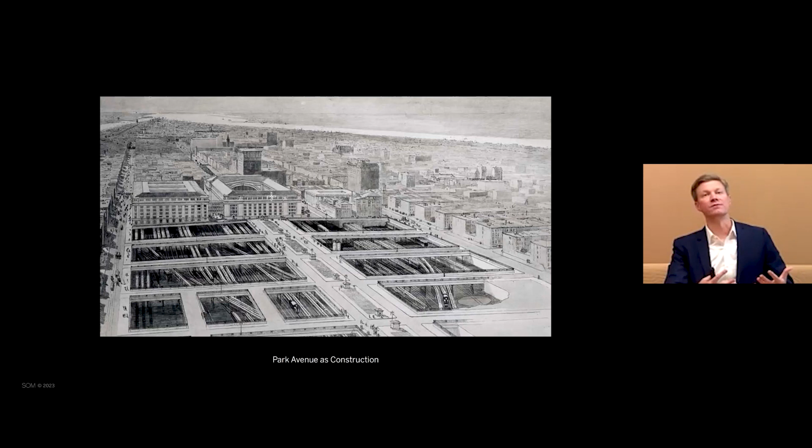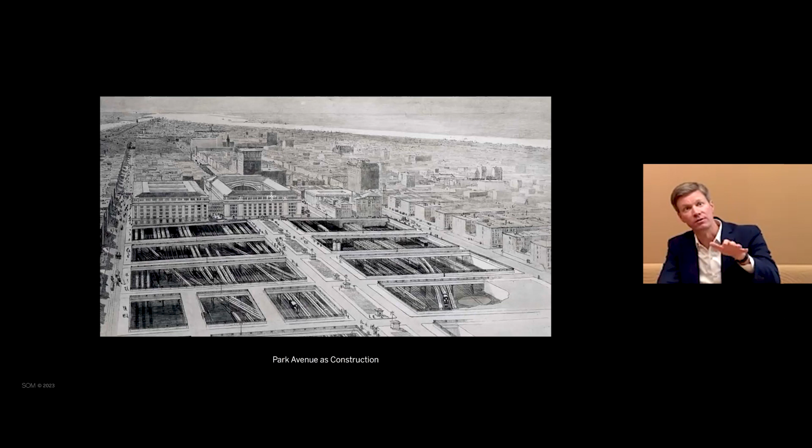Of course, these two individual buildings share a common location, Park Avenue, an incredibly important promenade in New York as well as the world, whose real estate was in a sense created out of thin air, if you will. Many of you likely know the story of how the trains entering Grand Central, which you see at the center of this image, were depressed into a sunken trench when they were electrified and then eventually covered over, creating the new real estate for Park Avenue.

And this brand new avenue created out of thin air became instantly a kind of civic space for New York, where celebrations were held, celebrating the victory of World War I, or everyday use, really as a public park for recreation, for strolling down the park of Park Avenue, or today for the lighting of the trees along Park Avenue. I take my daughter Caroline and we watch as the trees are lit up every year at Christmas time, or during open streets in recent years when Park Avenue is cleared of cars and New Yorkers of all stripes from all boroughs come out and enjoy this great civic public space, a great lung for the city.

Now, the architectural backdrop for this public space has of course evolved over time from a kind of continuous masonry street wall. You can see it's very consistent, and the height is very even here, and that was the case on both sides of the avenue, to the beginnings of the introduction of a new kind of architecture, beginning really with Lever House, which at the time, if you look at this photo, must have looked like a spaceship had landed on Park Avenue amongst all of these other masonry buildings lined up for 2 miles up and down the avenue. To what we have today, which really is a collection of the greatest architectural hits over time for the city of New York.

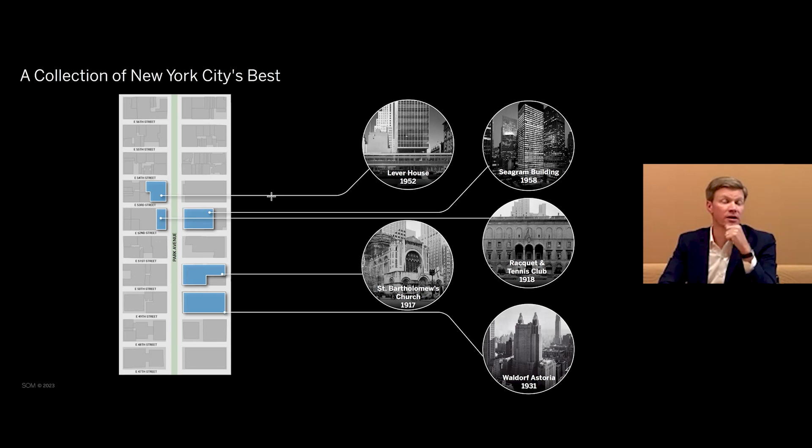So if we look at this map, just in a small section from 49th Street to 54th Street, we have 5 individually designated landmarks recognized by the city of New York, and I'm sure more to come. So it's evolved from a kind of consistency to really the greatest hits over time. And 2 of those designated landmarks, Waldorf Astoria on the left and Lever House on the right, engage with that public space that is Park Avenue in a meaningful way. The Waldorf Astoria invites the people into the building, has very generous public spaces, which we'll talk about, and Lever House invites them onto the site in the form of this open plaza, which Amy will tell us more about

in a bit. And so both of these projects, as Park Avenue evolves and becomes this series of all-star players, seek to ensure that future by restoring that past. Our experience and our thesis is that the restoration of these two projects is really a transformative act, one that builds a bridge to a new future for the buildings themselves and for their participation in the civic ballet that is the architecture along Park Avenue. So how might one go about an architectural project with that lofty idea in mind?

Well, we try to balance three competing ideas. One being the original design intent. So what did the architects want to happen? How can we discover that through original source material, which is not always what was built? The second ingredient in this recipe is the existing conditions, often different than the original design intent and also different than what was originally built. We have to discover that through deep research.

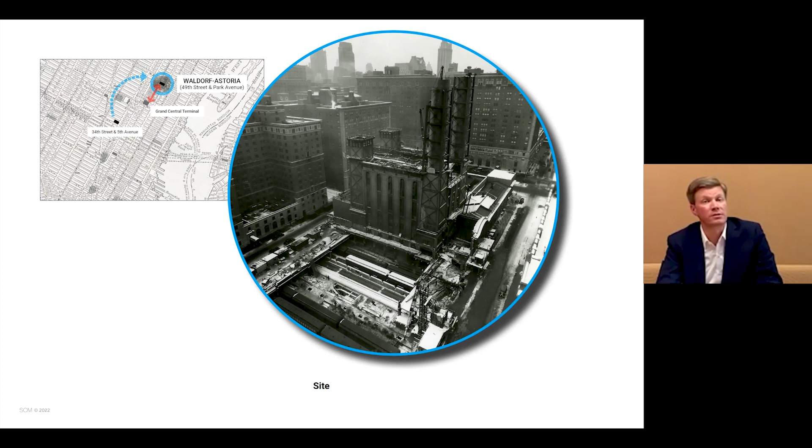was torn down. The building moved north to its current location at 49th Street and Park Avenue to take advantage of the new Grand Central Terminal and the importance of rail travel, and was built over those existing rail tracks, which you can see here in the image below this power plant at the site of the Waldorf Astoria Hotel.

And the architectural firm of Schultze and Weaver was hired to design this new hotel. They were a well-known hotel architect, designing other significant landmarks here in New York and around the United States as well. And they designed a hotel that had a kind of split personality. It was a kind of transitional building.

It borrowed from some of the nostalgic elements of the original Waldorf Astoria hotel that folks remembered, but it also had to be a modern, up-to-date, contemporary building. And so it really truly is, despite its contrast to Lever House at the beginning of this, a modern building. It's an Art Deco building.

This kind of split personality, this transitional sense was received in a variety of ways, sometimes positive, sometimes not so positive, as in the case of Lewis Mumford here in his New Yorker article. Nonetheless, the building opened to great fanfare and several decades of great success. It was frequented by celebrities, politicians, the elite.

Significant events took place there. President Kennedy is speaking. Grace Kelly was married to the Prince of Monaco there. So a very important cultural element of the United States and of New York in particular.

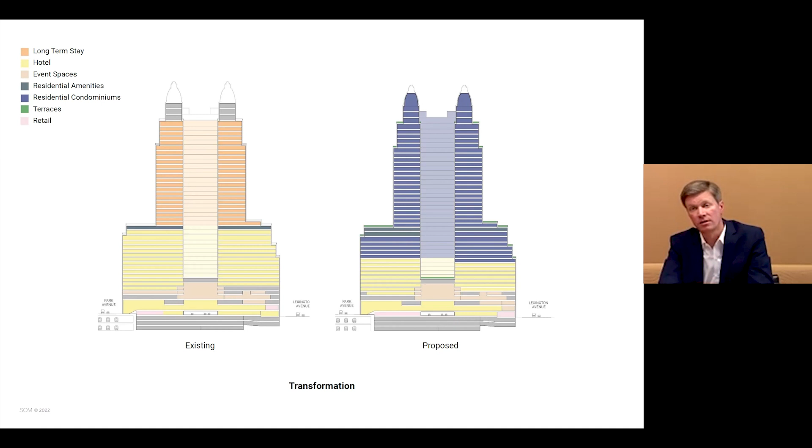So the project at hand, which we undertook beginning in 2016, was to convert a 1,400 key hotel to 375 keys, so there'll still be a hotel component, plus 375 condominium residences. And so that's the big change. There's many other changes we'll talk about, as well as restoration to many of the public spaces.

And it really always was and will continue to be an entire city within a building, a whole diversity of programs, from retail to events to hotel to residences. You can find it all in this building. That will continue to be the case. It's 1.6 million square feet, an entire city block. And so composing all these elements is a kind of three-dimensional jigsaw puzzle.

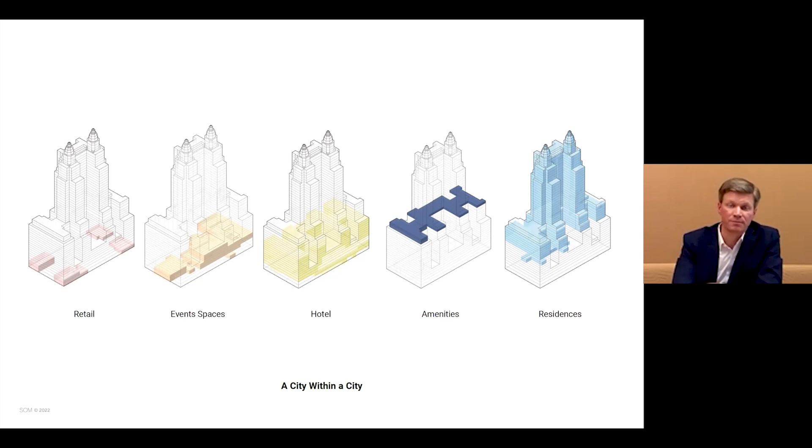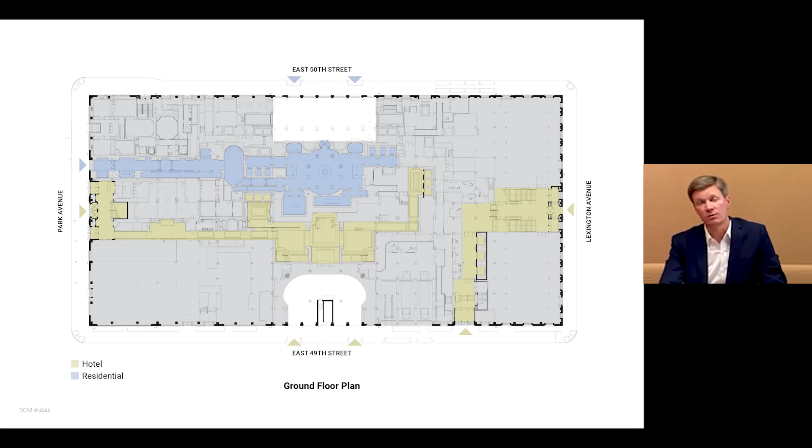So how does one go about creating that change, that transformation? So we'll talk about the reconfiguration of the building to start with. So the ground floor plan, for example, at Park Avenue on the left, we need two entrances. Now we need a hotel entrance and we need a residential entrance.

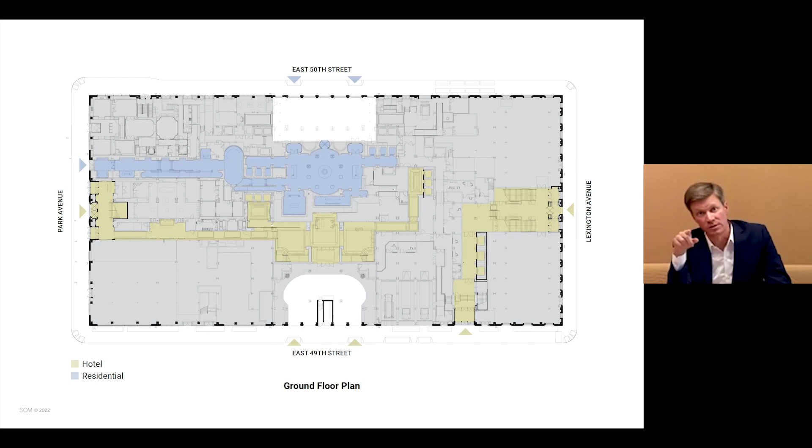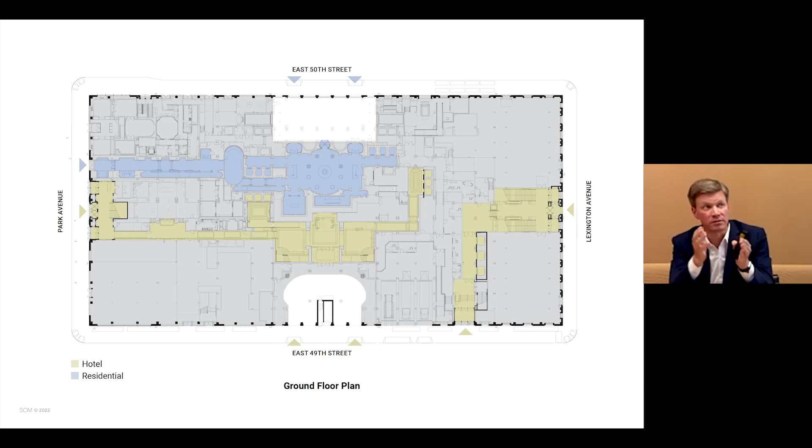We need porte cocheres for the hotel, which we now have on the south, and for the residential component on the north. And so you can see here highlighted in yellow and blue, you have two competing in parallel experiences, entry, lobby, and so forth.

At the mid-block portion, so we're still looking at ground floor plans here, there always was a porte cochere. You could drive all the way from 49th Street through that porte cochere to 50th Street, as seen in the image on the left. That was still the case at the time that construction began, although the composure of those elements had changed quite a bit.

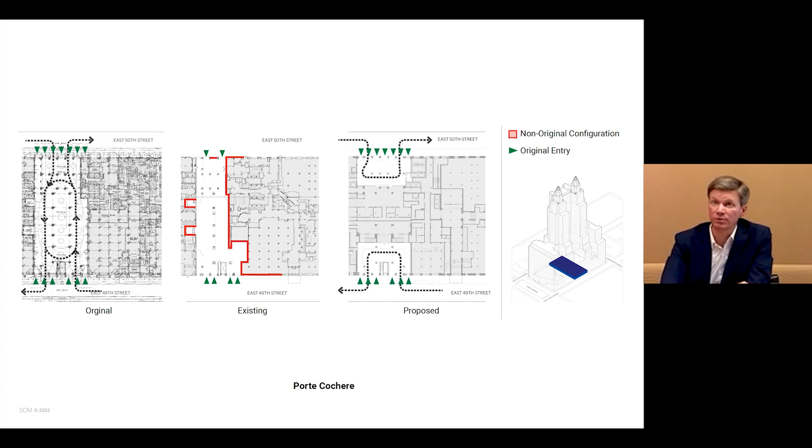And in the future, we're bifurcating that porte cochere into two distinct cocheres, one for each of those two programs, while restoring the configuration and the appearance of those openings on the exterior. They've been badly altered today, bricked in and so forth, filled with louvers. And so this is what they will look like from the exterior in the future, while having created an entirely new experience on the interior.

Bifurcating those porte cocheres allows us to do something else, though, which is to put the residential lobby where it really wants to be, at the center of the building, at the center of the block, and allows us to take from that residential lobby corridors to two distinct elevator cores, one on the east, one on the west.

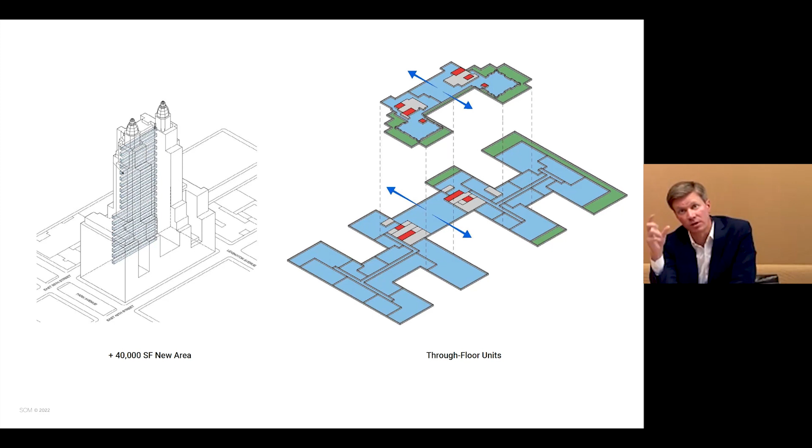The building essentially has two wings now, and one would take one of those two elevators up to your residential unit. That allows us to eliminate corridors which used to connect the two wings of the building, creating a lot more newfound space, if you will, and to create through floor units at that center spot, because we no longer need a corridor connecting those two distinct cores.

So there's a lot of kind of behind the scenes reworking of infrastructure like that in order to make a transformation like this possible. And that all is in service of the residential units. So here you see a typical floor plan of the Waldorf Astoria at a lower level. It's a very large floor plan, but it's just separated into two wings when we get off the elevator core on one side or the other and go to your unit.

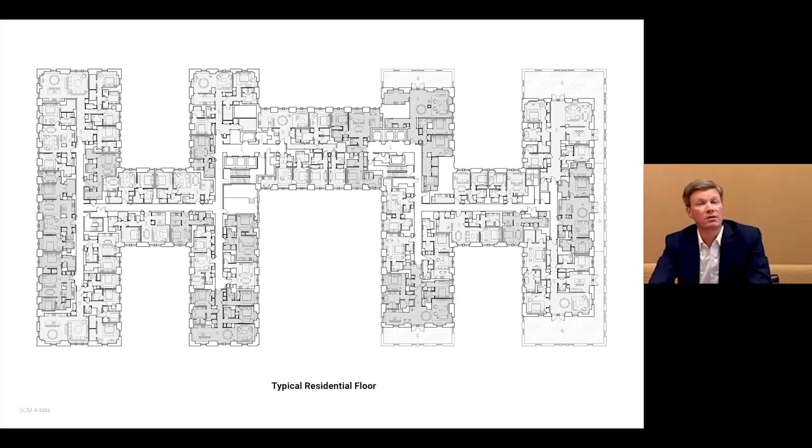When working with an existing building, it has to work with what's there. So the units are more cellular. There are crown moldings and coves around individual rooms. If this were a brand new residential building, what we generally see on the market is a flat ceiling, very, very open plan, right? Kitchen, living, dining.

You still have that openness that's contemporary here today, but within the framework of beams and columns and punched windows that already exist there. So one has to work with the existing structure and rhythm of the building that is there.

So moving to the public spaces, the Waldorf Astoria, I think, is really special because it has this incredible abundance of public spaces that you can just walk right in. And when I started this project, there wasn't a person that I told about it that didn't tell me, well, I cut through the lobby of the Waldorf Astoria every day on my way to work for 10 years, or I stayed there on the night of my wedding. Every New Yorker has a Waldorf Astoria, and this public space is a big part of that.

So these are section drawings. There are 3 of them here indicating the original condition, and that is a Schultze and Weaver drawing that we found in their archives. The center is an existing condition drawing that we drew, and the bottom is a proposed future condition that we also drew. So we can very carefully compare all 3 of these states to one another.

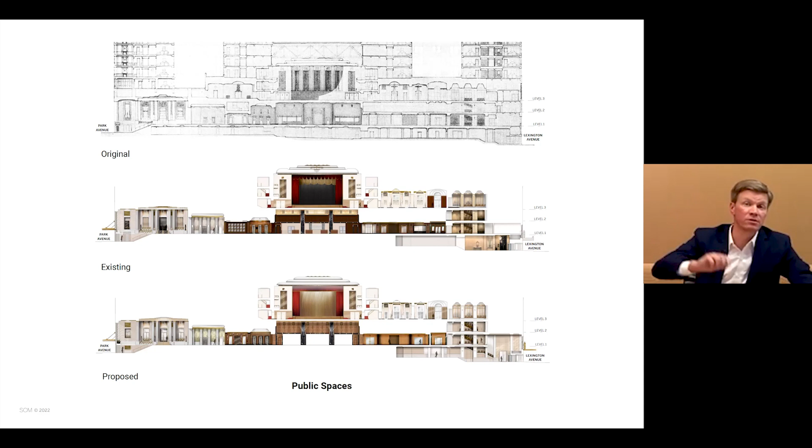You can also walk up to the 3rd floor where there are a variety of event spaces. This is what those spaces looked like originally in plan. So this is the main level of the hotel. It's actually up 1 level from that porte cochere level that we were looking at before. And this is another original drawing that we found in the Schultze and Weaver archive.

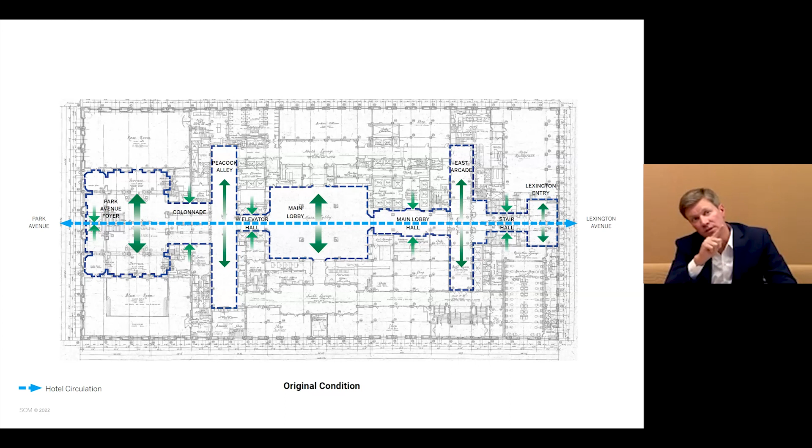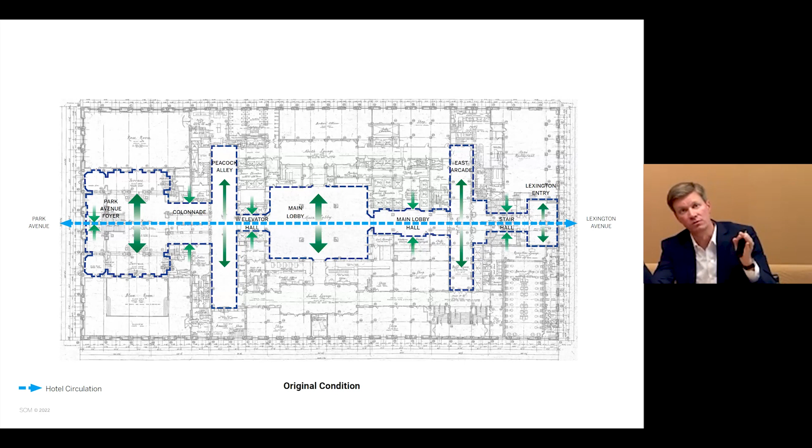And I will admit to you that we did not understand the configuration of these public spaces until one of our designers was tracing over this original drawing with a thick pen. And it was at that moment that we realized, as you move in an enfilade fashion from one avenue to the other, that the spaces expand and compress in a perfectly alternating rhythm as you move along. And this must have been to increase the sense of drama, and I think aligns with the variety of styles and decoration that one finds in room to room.

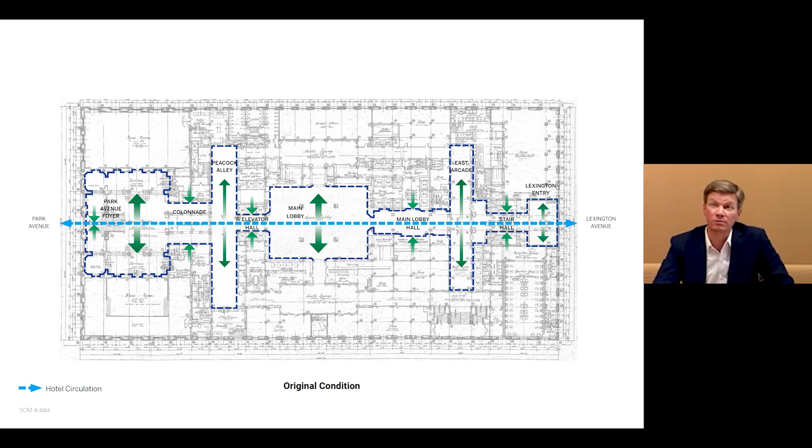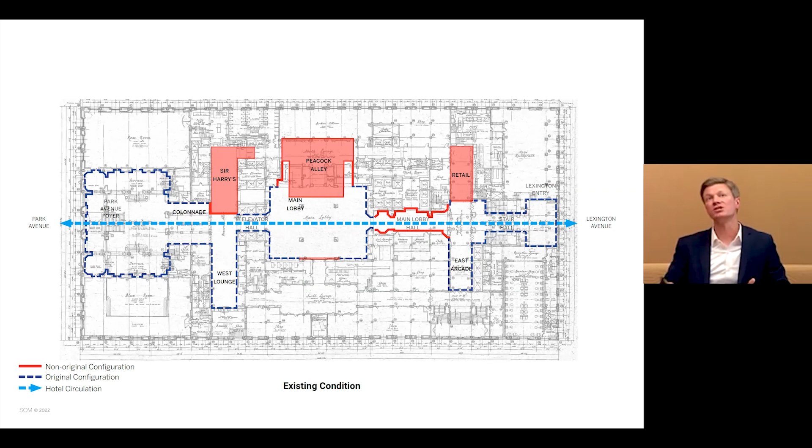How come we didn't realize this? Well, because the spaces have been changed and altered so badly over time that when you visited, you really just didn't even understand that. Spaces have been chopped in half, had restaurants inserted into them, had a store inserted into them, and really changed so much that sense of procession and drama had been lost. And so in the future condition, we're going to be able to restore that sense of drama as one moves through these public spaces. I'm very excited about that.

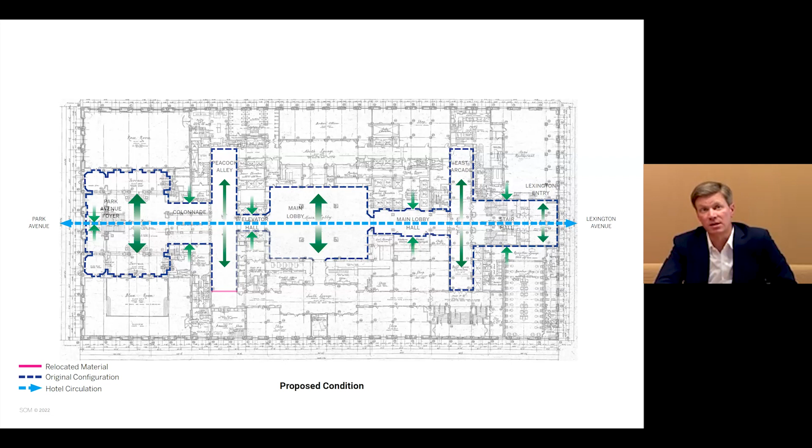And I'll show you just a couple examples of perhaps the most significant public spaces. We'll start with the Park Avenue foyer. But before we do, one additional theme that we're able to restore is the sense of lighting. And so we discovered in researching this project that there was this idea about how lighting should be handled in all the public spaces, that it should be indirect, that it should be somehow mysterious.

So I always compare it to Grand Central Terminal. That's how I think about it. So just down the road, built in 1913. There, the electric lighting of a public building was brand new. And so there are these chandeliers and they have exposed bulbs on them. They're showing off, this building is electrically lit. Isn't that great? Well, here, a few years later, 1931, the new thing will be to hide the sources of lighting. How is this space lit? It's mysterious. And that was consistent through the public spaces. However, that had been lost. That sensibility had been lost over time as piecemeal renovations had taken place.

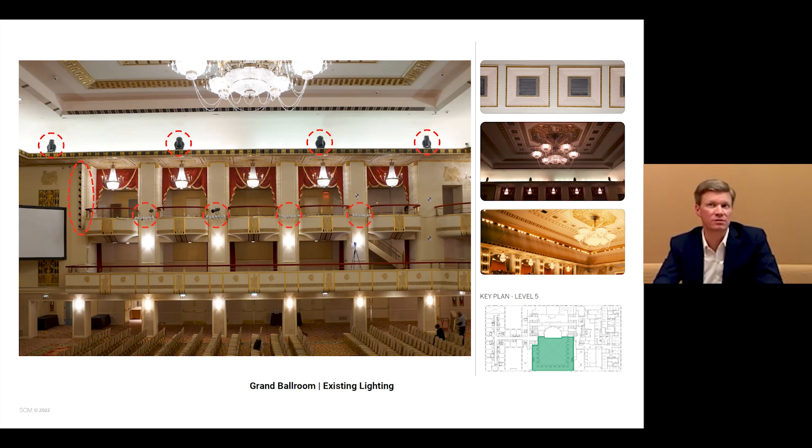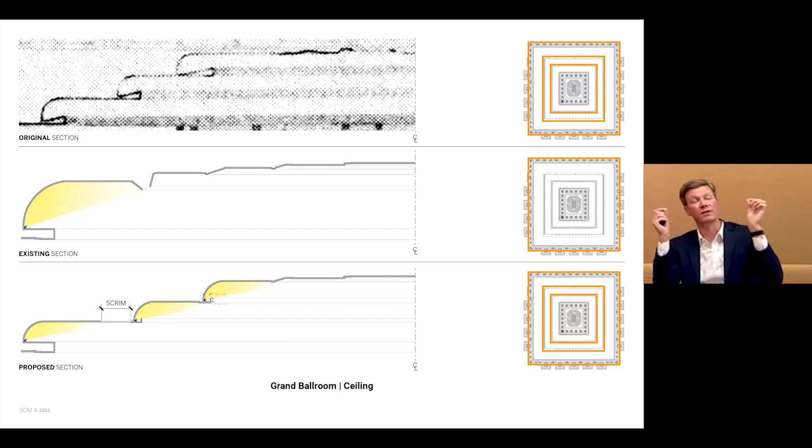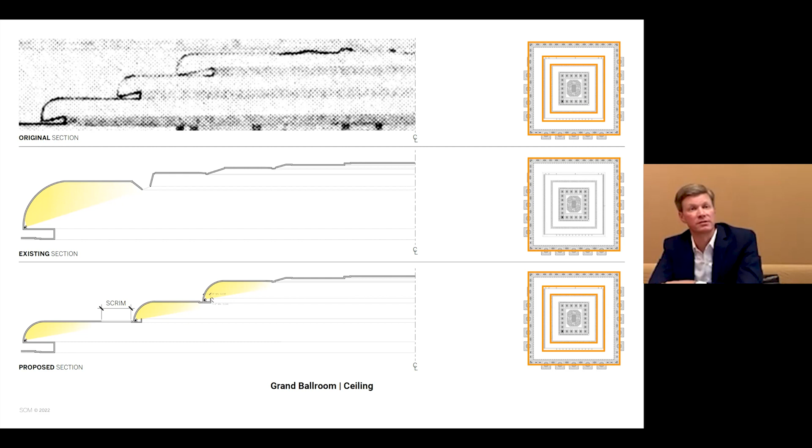And so what we're doing in the future, today under construction, is to maintain and restore the decorative medallion and decorative elements of the ceiling, but change its geometry to include for the first time those 3 hidden light sources as was originally intended but never built, and to use modern LED lighting technology, which can push light farther and more strongly to achieve an effect which is more similar to the originally intended space, a bright, lofty ceiling, featuring only its decorative elements.

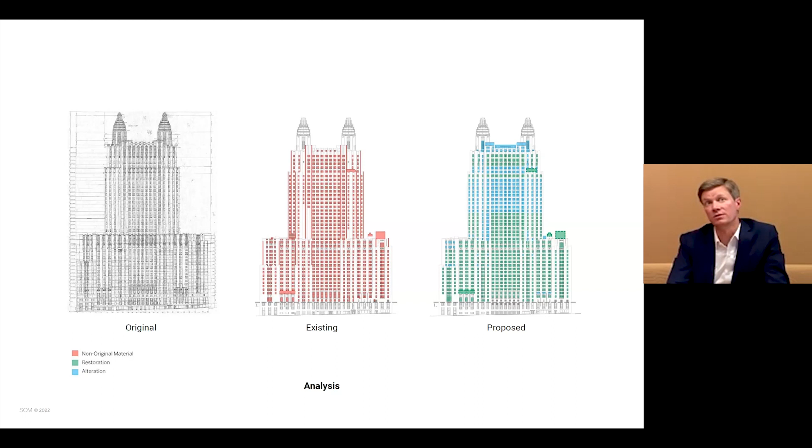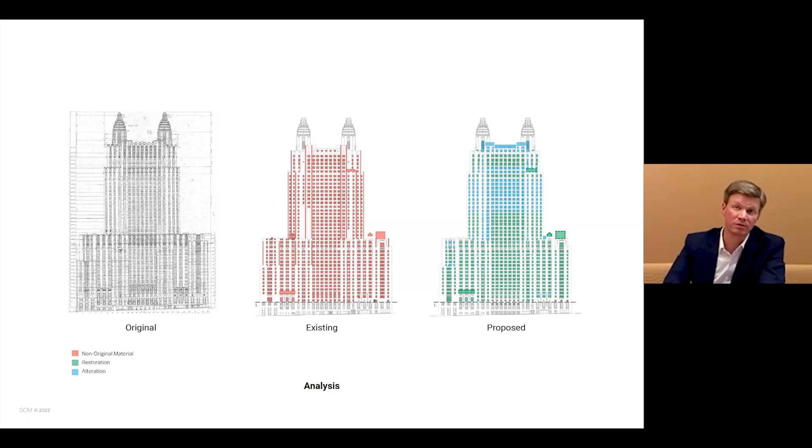The exterior was also analyzed in great detail, using the same kind of taxonomy of comparing original to existing to proposed. And here we've color-coded in red on the existing drawing everything that was non-original. And what we glean from this is, even though you may have walked by the building and thought, oh, there's this great building from 1931, it looks just like it did, in fact, much of the fabric was non-original and had been replaced. We've color-coded in the proposed everything that will be restored, as well as altered in one way or another.

One of those significant alterations is the windows. So originally this building had steel frame windows. They have very thin frames. At some point in the 1980s, the glass was removed from those windows, the frames were left, and new aluminum frame windows were attached over the top of those in-place steel frames. So that new aluminum frame, of course, was much thicker, didn't harmonize with the architecture as well. It was a different color than the original.

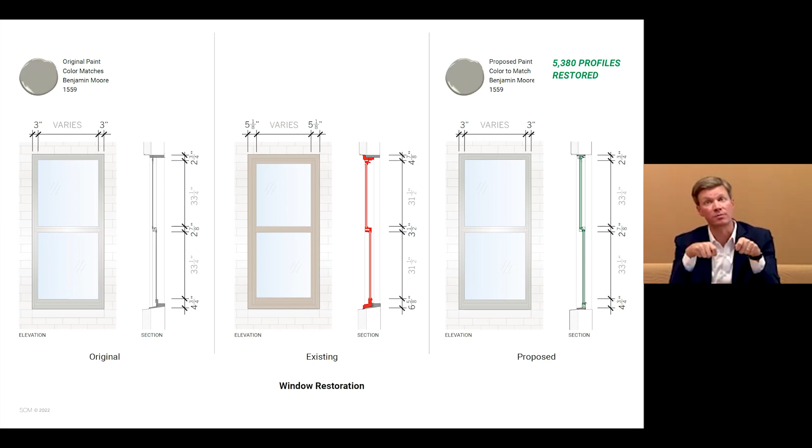And so we are taking out those non-original windows. We're taking out the corroded original steel frames and inserting new high-performance windows from an energy and acoustical standpoint that have frames which exactly match the original sight lines and dimensions of the original windows, as well as match the existing color, which we found on the 1 original window extant on the entire building. We are doing this 5,380 times over.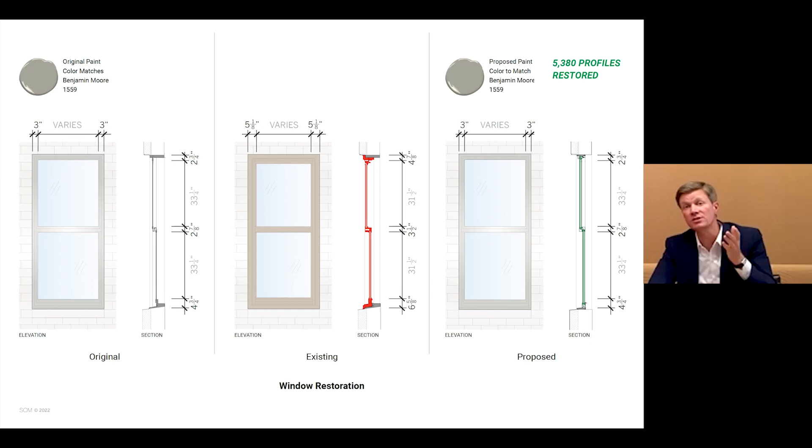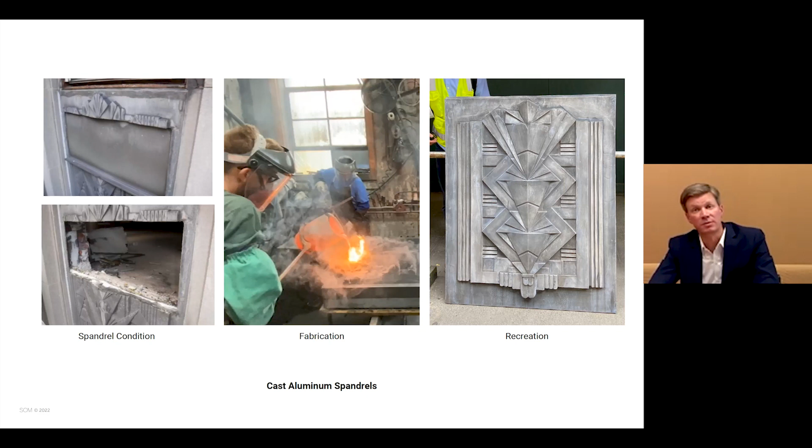There are additionally wonderful decorative spandrel panels all around the building of different types: terracotta, cast aluminum, cast stone. Many of these, somewhat unbelievably, have been punctured by mechanical equipment over the years, which you see in the image on the left here. And so we've identified artisans to work with to recreate new replicas of these beautiful original spandrel conditions. And so here you see a recreation of one of those cast aluminum spandrel panels, which you see in the process of being poured in the center image.

So there are many small restorative elements such as windows and spandrel panels and cleaning and so forth that go together to make up this project, as well as more significant reconfigurations of the spaces inside. But it's our proposition that when you put these small pieces together, these small moves, even though you might not understand those windows changed color, they'll all create something that is greater than the sum of the parts.

And when one walks by the building, my aspiration is that it will seem like something new. People will notice it for the first time. Wow, there's something different there. That's sparkling, like it really hadn't before. And people will be invited in and want to come in a way that they haven't in decades.

So Amy's gonna take us forward a couple decades and tell us how times changed quickly along Park Avenue. Thanks, Frank. Hi, everybody. My name's Amy Garlock, and I worked with Frank on the Waldorf Astoria, and I also have worked on Lever House. And as Frank said at the beginning, only 21 years separates the completion of the construction of the Waldorf Astoria from the completion of Lever House. But those were very eventful 20 years.

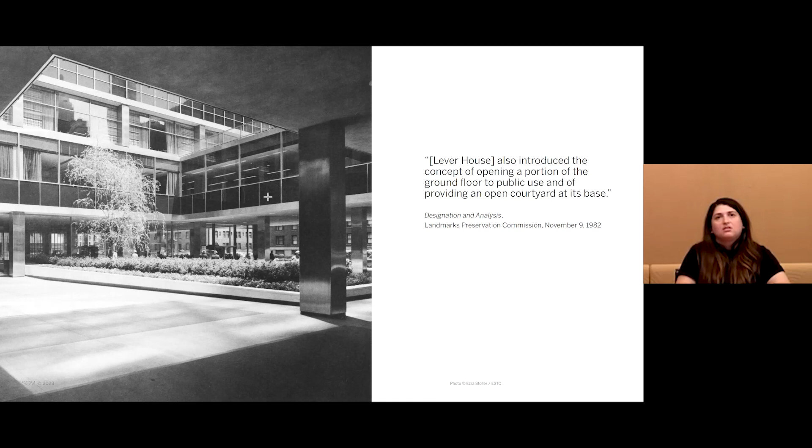Of course, the curtain wall was also revolutionary. The technical precedent of this curtain wall informed many of the other buildings along the avenue. And it's something that set SOM up as a business to continue to create more wonderful modernist office buildings similar to this one. Here you can see the configuration of the podium and the tower and the open space at the ground floor below that podium, and the large welcoming terrace on the third floor above that podium.

And at the ground floor, as I was saying, the lobby is really the only presence that intrudes onto this large open public plaza with a planter, which originally had a water feature designed into it that was never built, and a very concise display kitchen, assembly hall, and loading bay at the back of the site towards Madison Avenue. That assembly hall and display kitchen today is a restaurant.

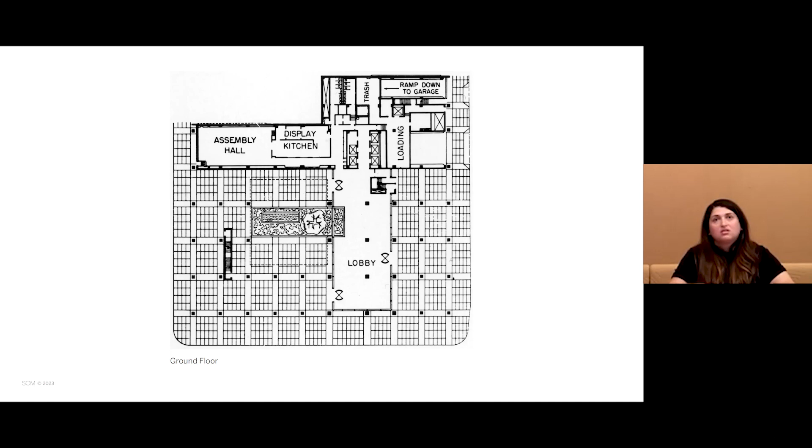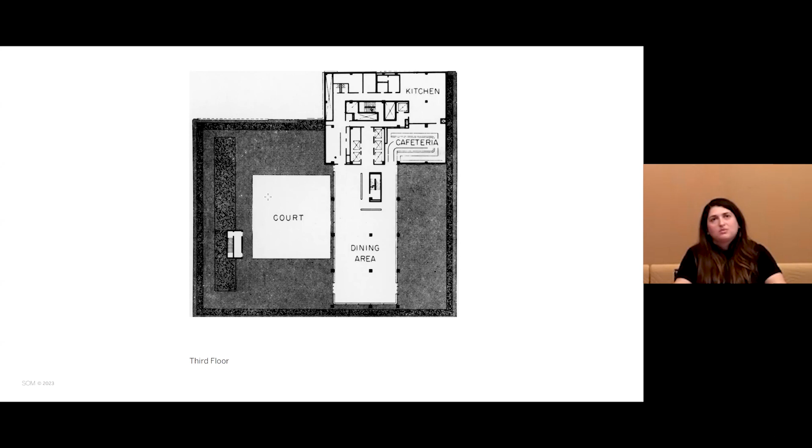On the third floor at the top of that podium, there was a dining area for the employees of Lever Brothers, as well as a large terrace for them to have fun and dine outside. My favorite is the original shuffleboard court, which we're hoping to reinstate.

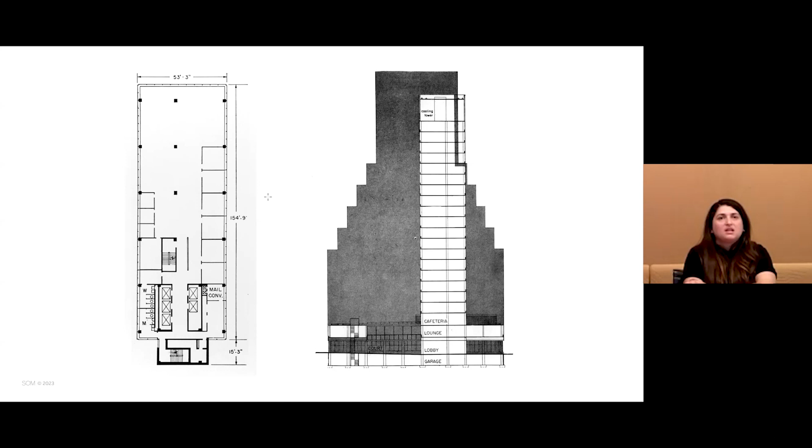Now, you may think that Lever House is a much more modern appearing building than the Waldorf Astoria. But really, when you look at the curtain wall in section in this original drawing, you can see that it is kind of a masonry building with a veneer of glass on the outside. Because of New York City fire codes, it is actually required, at least it was at that time, to have a significant amount of masonry separating each floor. And the masonry is required to hold up those spandrel panels of glass.

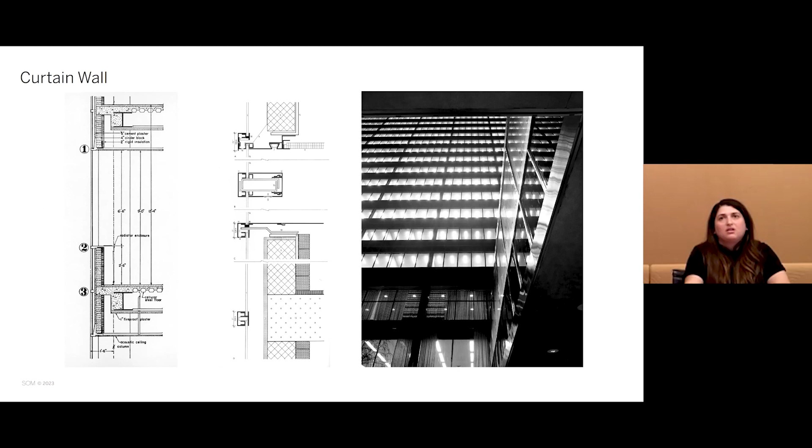So the actual proportion of the windows in Lever House is not so different from what you get at the Waldorf Astoria, even though they're using very different kinds of technology to achieve their exterior skin. And Lever House was looking towards the future in terms of building maintenance, and engineered and integrated a building maintenance unit, or a window washing unit, which they used to maintain the building and also to advertise their soap.

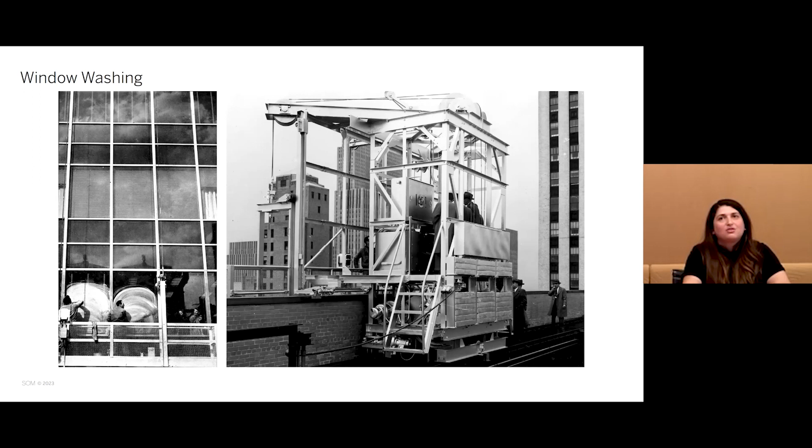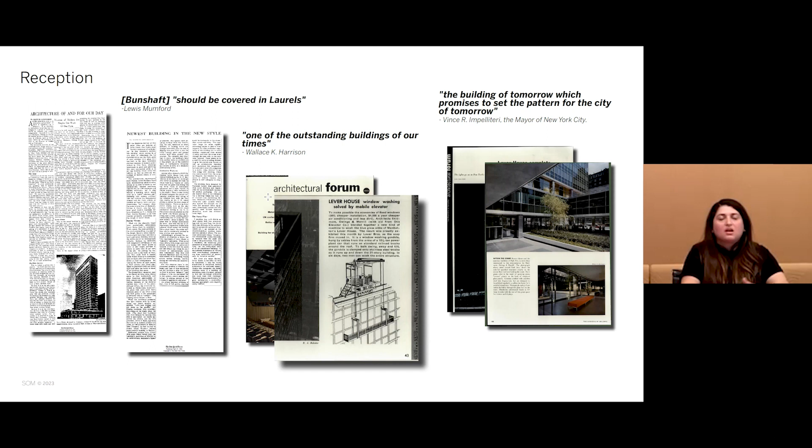And the building itself was a great advertisement for Lever Brothers when it was completed. It was great for employee retention, and it also was an advertisement for themselves as a brand that was forward thinking. And the building itself was really received quite rapturously almost right away. SOM certainly did our part to promote it by showing it in a MoMA exhibition as it was still under construction, and really promoting it to all of the press. But it was really seen as a standard bearer almost as soon as it had opened.

And we've had the extraordinary opportunity to really take care of this building over time. For a building that is just over 70 years old, it remains relevant and it remains looking quite new, but that's because we've been taking care of it for that whole time. And also because of its landmarking. In 1983, it was threatened by a development, and this really triggered outcry from Jackie Onassis and Philip Johnson, who were integral in the creation of the Landmarks Preservation Commission. And so Lever House was landmarked partially to prevent its redevelopment.

And so because it's been landmarked, all of the work that we've done over the years is sensitive to its original condition. And it has to be, not just because we want to preserve this for the future, but also because everything that goes through renovation process needs to be reviewed by the Landmarks Preservation Commission.

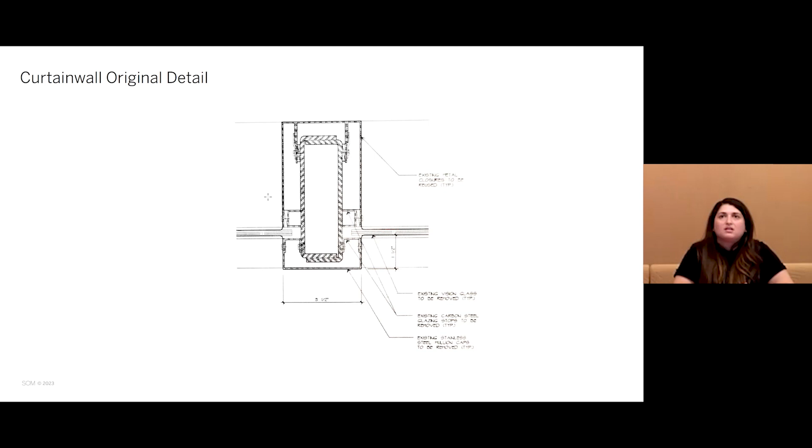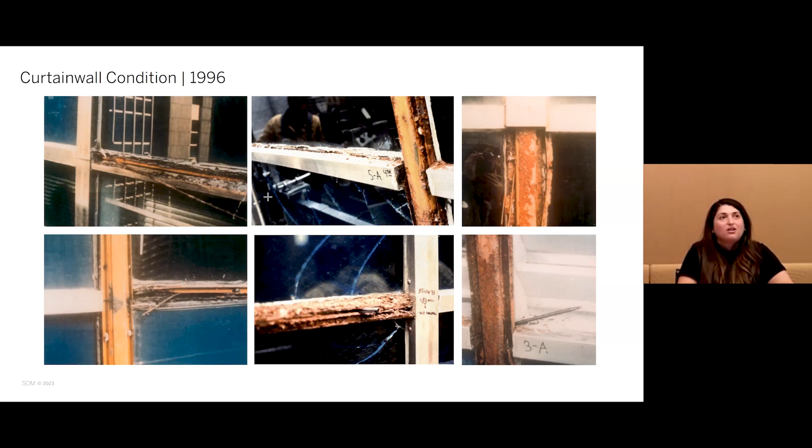So the original curtain wall was made with carbon steel core and stainless steel cladding. And by the mid 1990s, that carbon steel that was holding up the stainless steel cladding had corroded due to some sealant failures, and basically just 1950s era curtain wall technology, which has since improved greatly.

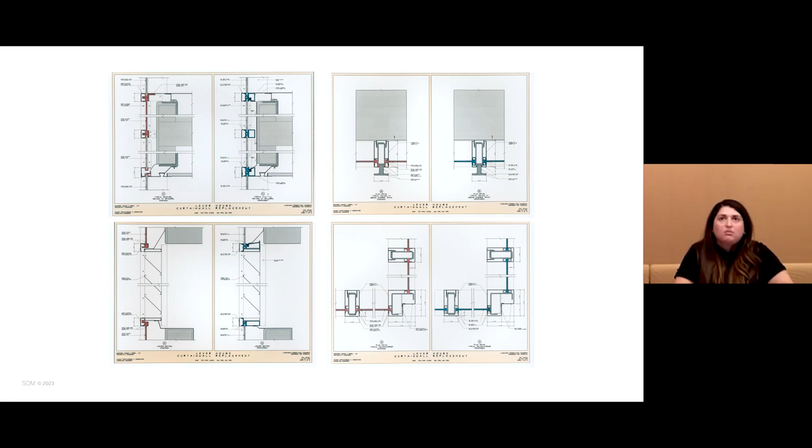And so the first project that SOM took on in the late 1990s was the replacement of the curtain wall, including replacement of much of the glass, and replacement of the cores that are holding up the pieces of the curtain wall. However, the stainless steel exterior was restored or replaced only when damaged. And so there are original pieces of the facade that remain.

And the original design intent was completely preserved, both in the color of the building and the kind of hierarchy of the stainless steel, especially the window washing tracks that define its structural bays.

The paving was in the most dire shape, and it really originally was this clean extension of the interior terrazzo into the exterior plaza, with the inscription of the structural grid in the light color of the exterior terrazzo with the dark colored infill of the grid.

The existing condition preserved some of the light and dark, but had been patched over time. The terrazzo dividers were showing. Basically every winter, the water got in, froze, and spalled this exterior terrazzo. So it was not holding up very well and was not safe.

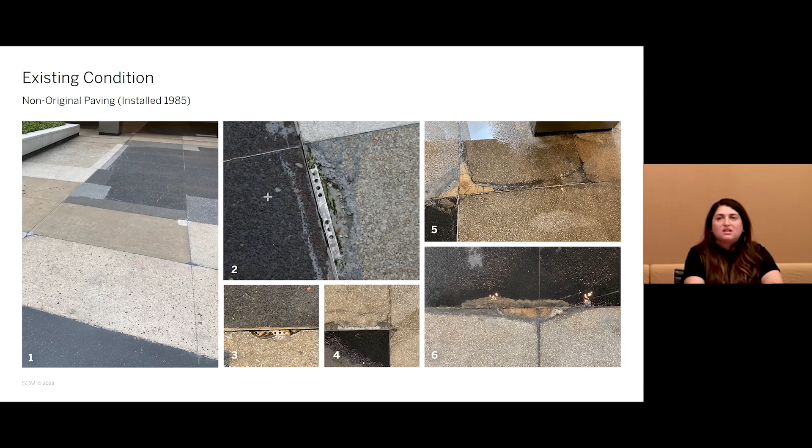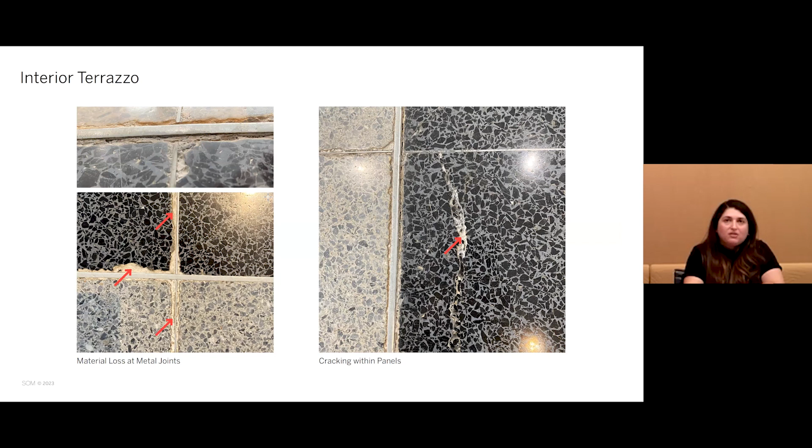And we looked to the interior terrazzo to think about how to restore this. The interior terrazzo was in much better shape. It did have cracking and some material loss at the metal joints, but it had the original aggregate and the original color of the cement binder. And we know that the interior and exterior were intended to be the same.

So we did spectrographic analysis of the stone to try and understand what types of stone and what the exact color mix of the cement was. And we took that and we applied it to extensive mock-up testing, refinishing testing, both at the interior to reference for color and stone type.

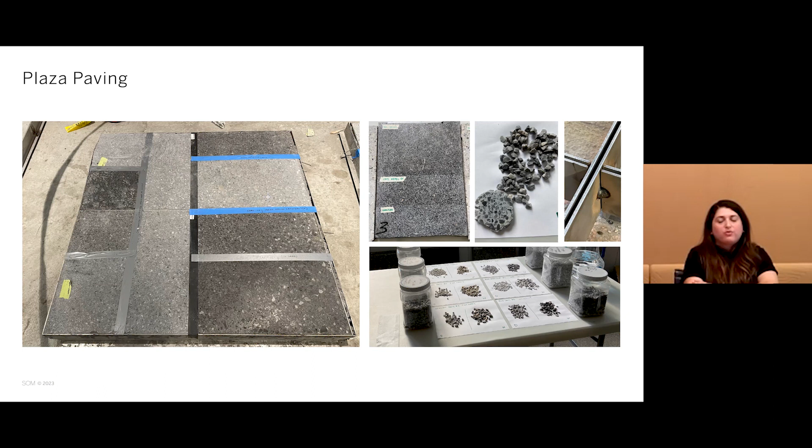There is a black limestone wall that runs the length of the site in front of the now restaurant, but what used to be that show kitchen, and it runs into the lobby. That limestone had oxidized over time, really lightening the color, and it had been deteriorated by some unsympathetic sealants and some corroded metal.

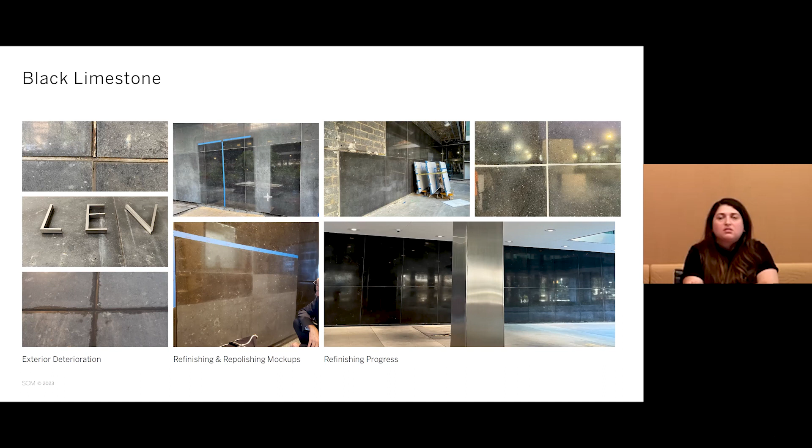There is white marble cladding on each of the stair cores and also in the elevator lobby. We matched this to a quarry in Danby, Vermont. And so where possible, we preserved the original marble at the stair cores and especially at the interior where it was in good shape. We refinished it. It had been shined to a very high polish over time, which was not the original design intent.

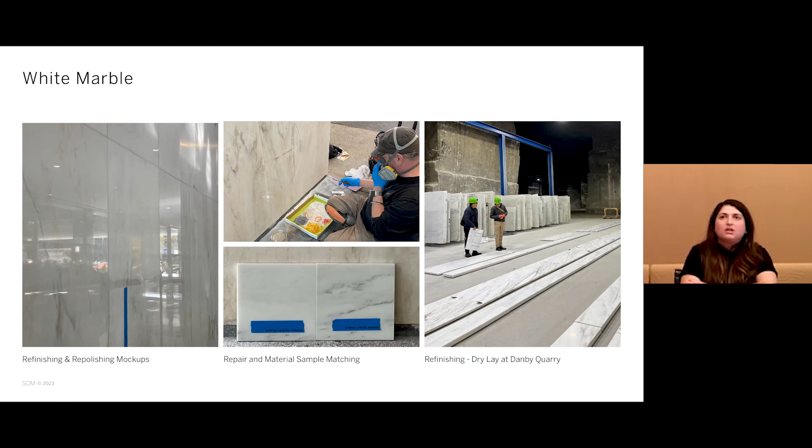There were some patches too where we had to use paint and artistry to conceal some cracks. And then where we couldn't repair it because it was too far gone, too much material lost, we replaced it in kind with matching material that we got from the quarry in Vermont.

All of the stainless steel on the columns was as much as possible retained. We took it off site, and basically these are hand processes where there's a guy who takes a hammer and hammers the dent in the opposite direction and uses a polisher and a power washer to refinish this back to its original brushed finish.

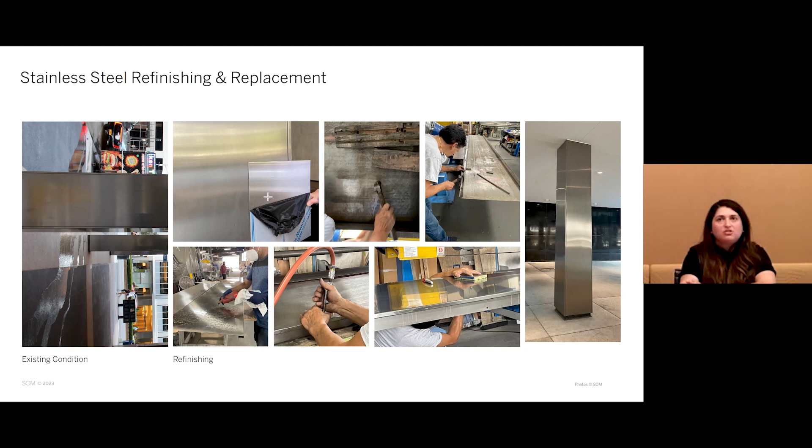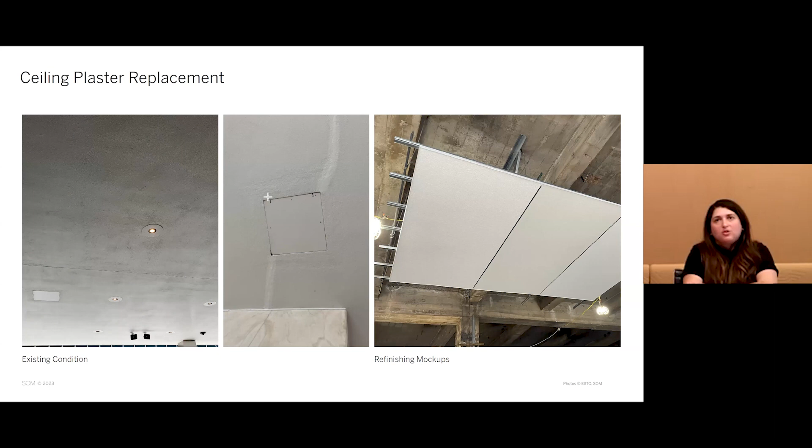And the plaster ceiling, we also did extensive mock-up and material testing. The plaster itself was cracking and damaged by water over the years. And so a modern stucco plaster has been used to replace it, which will be more durable both at the interior and exterior, but matches the original finish and the original jointing.

And at the plaza, there were original designs, as I showed, that had a water feature. There was actually a foundation built for it, but it itself was never built. The original planting was kind of a raised bed with a single tree. But we are proposing to replace that, and it is in progress, you can go see, with a grove of birch trees, which will create kind of a central feature and emphasize that continuity of interior and exterior, and the birches also echo the rhythm of the columns in the plaza itself.

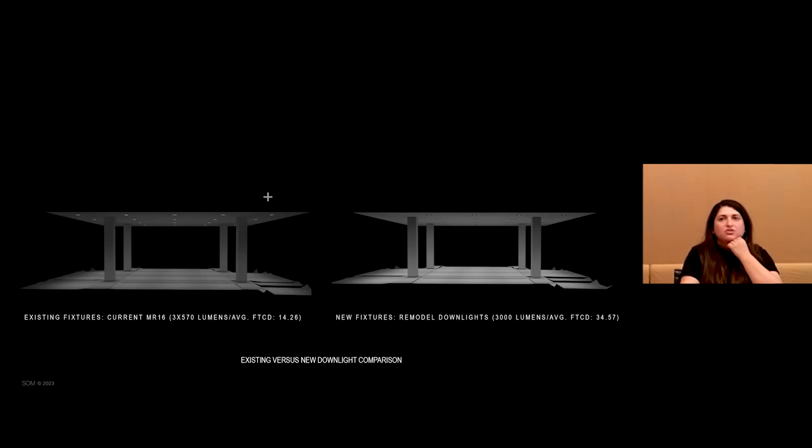We've replaced the lighting. You can see the very dark condition during the daytime prior to restoration. And by replacing the light fixtures themselves with modern LEDs, we're able to greatly increase the amount of light on the plaza to make it a nicer place to be.

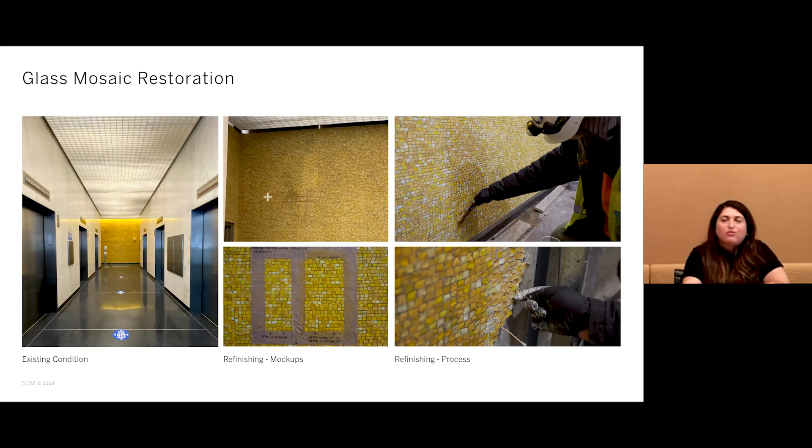At the lobby, at the interior, we've focused on restoration of materials, same as at the exterior. There's also a Murano glass tile wall at the rear of the lobby that we've patched, extended, and cleaned thoroughly using great forensic care. And the lobby itself is intended to remain open and clear as it was originally, with those display cases and with seating for people to wait.

The roof terrace itself, we have that great shuffleboard court and the original paving. When we came back to the project, the paving was all not original and painted this kind of bright red. The trees were not in healthy shape. They had outgrown the shallow bases of the planters. And so we've proposed new furniture and lighting and new planting to have this be an amenity space for all of the tenants in the building. And we've also found opportunities to bring interior and exterior closer together, similar to how we have that at the lobby.

And the office spaces themselves will be renovated and brightened to keep this building relevant into the future, which is really the goal of all of this restoration work. This building is 70 years old, and we hope it can last another 70 years.

And the Waldorf and Lever House are still relevant, not just because of the work that we're doing, but also because of landmarks. And because these buildings are landmarked, there is additional incentive to think of creative ways to keep them relevant into the future. And it creates a Park Avenue where you have a greater diversity of buildings because you have all of these buildings representing different points in New York's history.

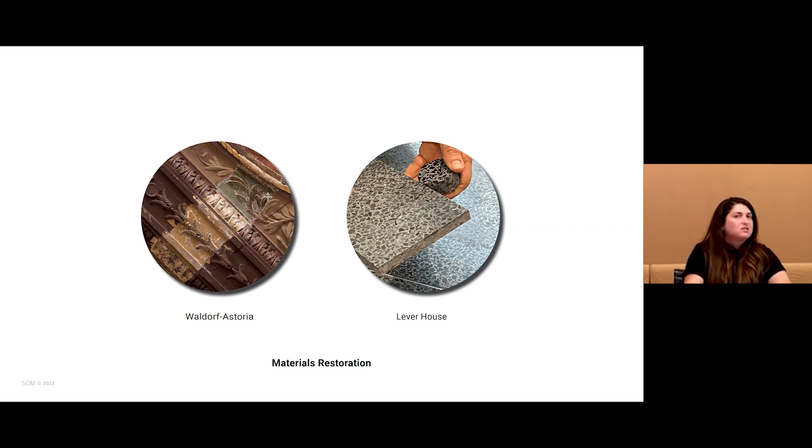And restoration, we always think about that as something of a paradox, because by restoring it, you're actually creating something new, which then refers back to the original. And it's this kind of cycle where the two are kind of inseparable. And so that's why we're calling this the future of the past and the past of the future. Everything that's old will become new in the future. And by restoring these, we're ensuring that the future of Park Avenue is bright.